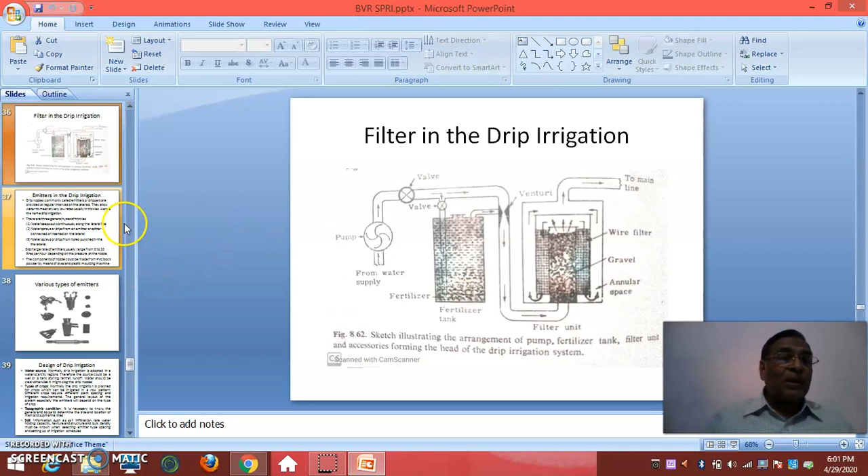I think we stopped the drip irrigation yesterday at some point of time. We will try to continue and then finish this drip irrigation in this video. Let us go back to our presentation from earlier. So, in drip irrigation, we have covered many things, like the definition, and then we stopped at emitters. I think we have to cover the emitters. We came here, to the filter in the drip irrigation. Now the emitters are being covered.

So let us see how the emitters work. Emitters in drip irrigation: drip nozzles, commonly called emitters or drippers, are provided at regular intervals on the laterals. It all depends upon the kind of crop you have. They allow the water to emit at very low rates, usually called trickles. It's drop by drop. It trickles. Hence the name drip irrigation. Since it comes drop by drop, it is called drip irrigation.

There are three general types of trickles. One is water seeps out continuously along the lateral line. We have already seen that along the lateral line water continuously seeps through various holes. Another one is water drips from the emitter or spitter. Not only emitter, it is also called dripper, emitter, spitter. They are all synonyms. These emitters are simply inserted into the lateral, and then they simply drip the water.

Another one is water sprays or drips from holes punched in the lateral. A hole is punched directly at the particular point where the plant or tree is. In fact, we said bigger trees are also fed with this kind of drip irrigation. The discharge rate of emitters usually ranges from 2 to 10 liters per hour, even bigger if the tree is big, depending on the pressure at the nozzle. The pressure at the nozzle is very important ultimately.

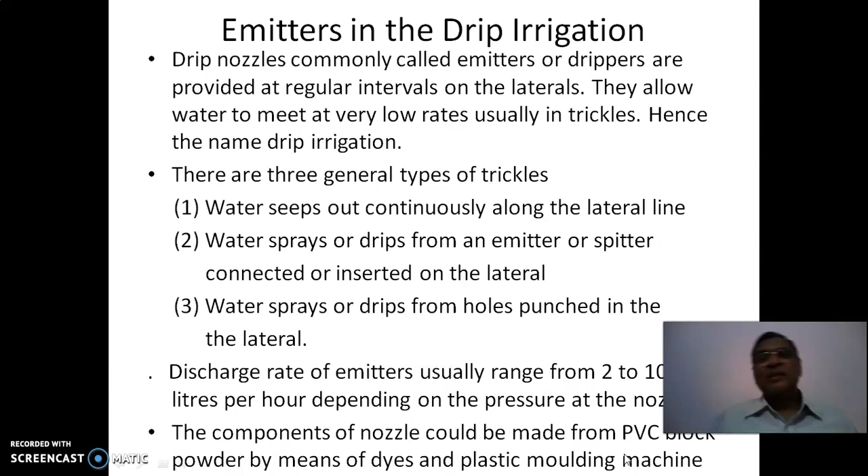The components of the nozzle could be made from PVC block powder by means of dies and a plastic molding machine. Basically these drippers are made by molding machine. You can see here various kinds of drippers. Normally this is the kind of dripper we see when we visit the nearest one, the grape gardens in Hyderabad. Most of you can visit there. This is the usual dripper. There are other drippers also. These are the various kinds of drippers.

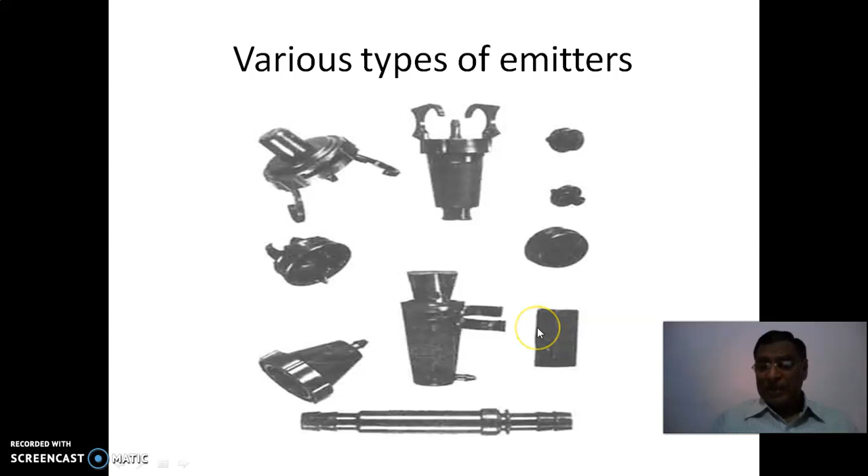Now we talk about the design of drip irrigation. There are various items to discuss: the water source, types of crops, topographic condition, soil, and climate. You must collect all this information before you design. Normally, drip irrigation is adopted in water scarcity regions. Therefore, the source is not a big thing. Either a small well or a tank, or even rainfall stored during the rainy season can be utilized for drip irrigation.

This is one important concept, particularly in areas with no water source through a well or a canal. The runoff from rainfall can be stored, but it has to be filtered properly because the drip nozzles get clogged. That is very important. Even well water has to be filtered, no doubt. That is why the filter plays a very important role. If you don't care about filtering, you will have a lot of problems in the future.

Then the types of crops. Normally, in drip irrigation you should have row types of crops. A row pattern should be there. You cannot have a very spreading type, because for every plant we are watering exactly at the root zone of the plant.

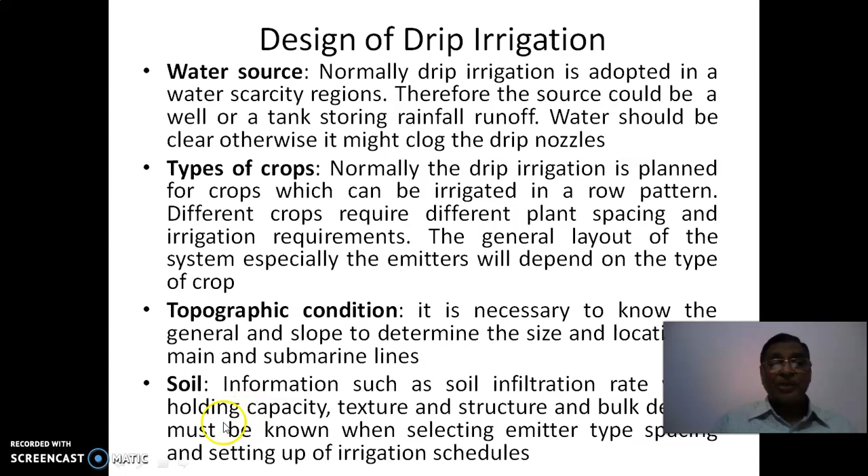For example, with sandy soils, you can see there is less irrigation interval, that means you frequently have to add water, with less drip rate. The discharge rate will be less. Whereas with heavy soils like clay, you can have more drip rate. That means more discharge, but the irrigation interval will be large, even 5 days, 10 days, and sometimes even more than that. So this is how the soil information will help you.

Similarly, climatic records, we have discussed in sprinkler also how the climatic records help us, how much evapotranspiration is occurring from that region. That information is very much useful here also, to decide the kind of irrigation schedule as well as the depth of water to be applied and so on.

So when it comes to basic hydraulics, some formula for discharge computation was already given earlier, but here the head drop is the one which is very important in drip irrigation. The loss of head by friction in drip irrigation is given by this formula: delta H is equal to 15.27 Q to the power 1.852 into L divided by D to the power 4.871. This is the Hazen-Williams equation using C equal to 150.

So basically it gives the energy drop by friction. Q is the total discharge in the pipe; the computation of this we have given earlier. L is the length of the pipe in a particular section. See, you have a main line, each section will have a different discharge. Then the length of the pipe in that section, then the inside diameter, all these things we will decide in the design parameters. So this is how the head drop is computed.

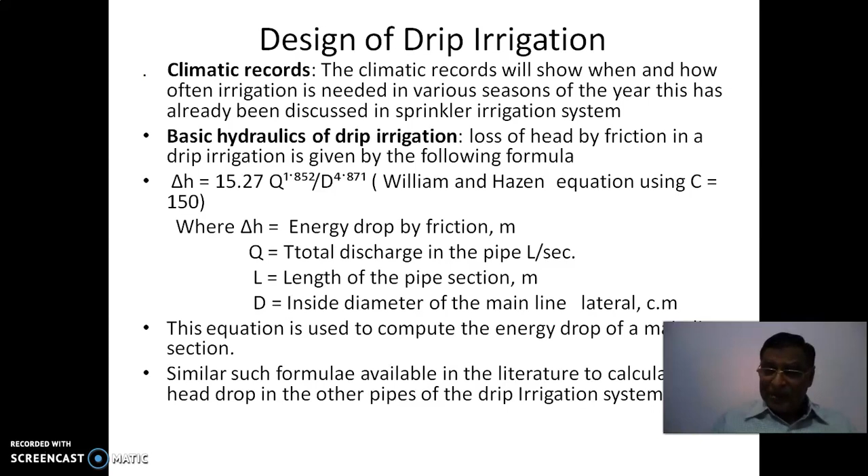This equation is used to compute the energy drop of a main line, and of course with some modification for the laterals and even submain and so on. Similar formulae are available in the literature to calculate the head drop for each and every component of the drip irrigation.

Establish the lateral length L and operating pressure head H ratio L by H and total discharge Q in LPS. So length and operating pressure head and its ratio L by H and total discharge Q. These things are needed. You must know. So then step 2, what is that?

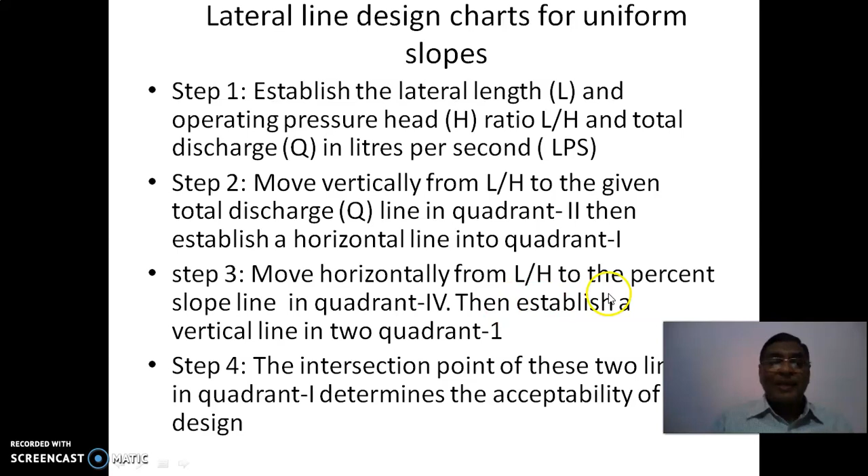So then you extend a horizontal line into this quadrant. Keep that line here. Then what is the next step? Determine the submain slope. Sorry. Yeah. Step 3, move horizontally from L by H to the percent slope line in quadrant 4. Then establish a vertical line into quadrant 1.

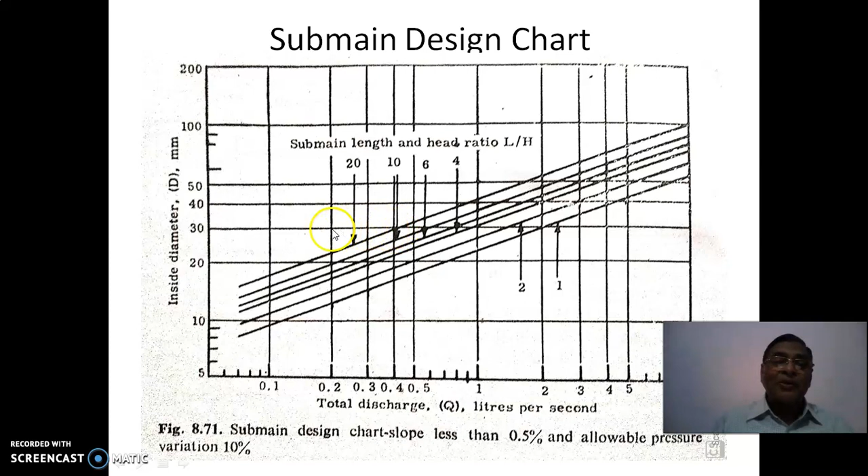So then you compute this slope delta H by L. Based on the discharge and that delta H by L, you will decide the diameter. Like that, in every section you will be computing the discharge, and the discharge decreases from one section to the next along the main line. So you will be decreasing your diameter also based on the delta H by L of this line slope. So along a main line there will be decreasing diameters.

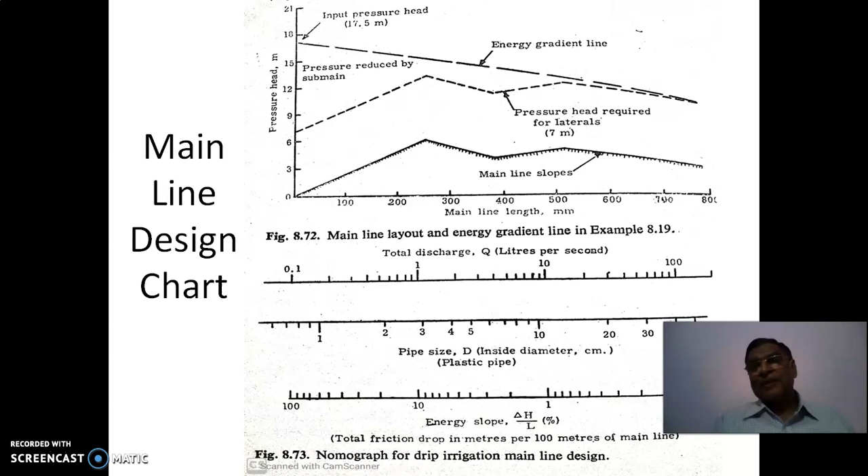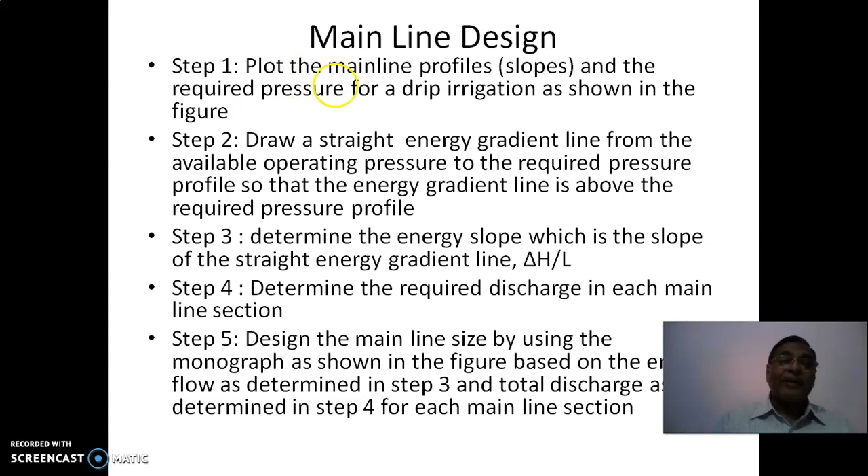So this completes the mainline design, and of course various steps are given here, the same thing we have explained, for submain design, mainline design, and also lateral design. So I think we have finished drip irrigation here. I will stop this video here.